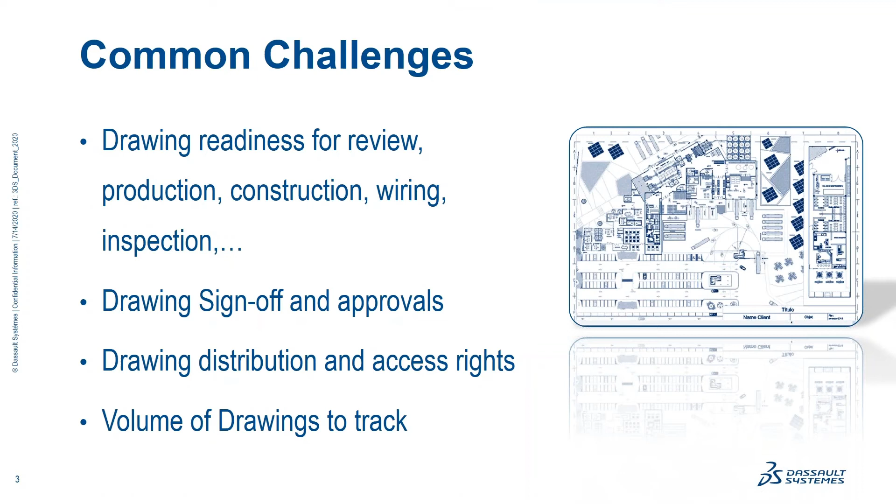With that come processes centered around sign-off and approvals, as well as the distribution of drawings and associated access rights. What we've learned over the years, being at the forefront of design tools and applications here at SolidWorks and Dassault Systèmes, is that the volume of drawings to track is, for most of our customers, pretty sizable. That's a problem we are attempting to solve.

We are bringing together people across an organization, data, and design ideas. Our 3DEXPERIENCE platform, a cloud solution, is uniquely positioned and purpose-built to make that happen, to bring together unstructured collaboration as well as structured collaboration methodologies, where many people in an organization can share information seamlessly through technologies such as cloud file sharing, similar to what you might use today, but also combining that with the ability to dashboard information and leverage communications through communities. That's all unstructured, and we have some solutions to address the challenges that might come with that.

But with drawings, as it relates to sign-off and approvals, there's also a very structured element to it. Here we'll show you some capabilities around lifecycle management of DWG design files, task management, all the way to project plans, and show you how you can leverage these two technologies, DraftSight and the 3DEXPERIENCE platform, to bring these two domains of data management and design in drawings nicely together.

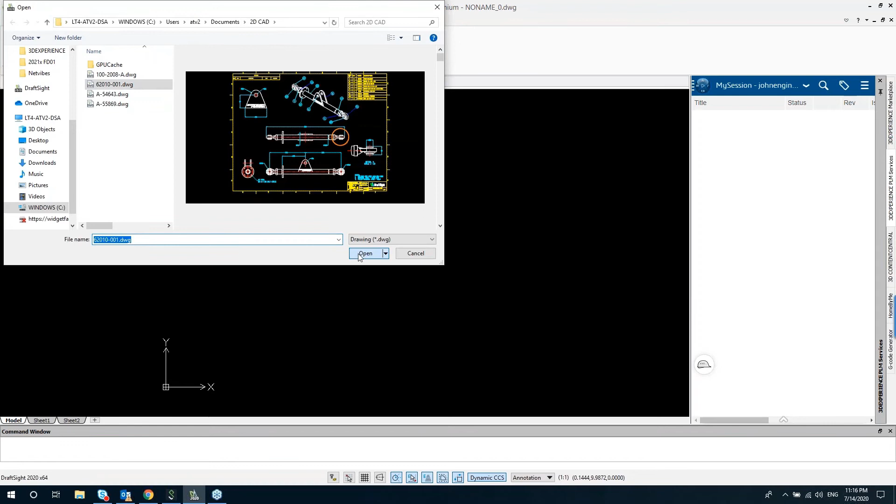Loaded beautifully in DraftSight. Now let's take a look at the 3DEXPERIENCE task pane on the right side of the screen. I'm going to expand it so it's a little easier to see. As soon as we open a drawing in DraftSight, the platform recognizes that we're working on a particular DWG drawing.

A few things to point out: we can see the title of the drawing, its current status, and in this case it is currently not synced and not stored on the 3DEXPERIENCE platform. We can also see which revision we're working on and whether this is the latest version available on the cloud.

To get started, I'd like to show you the various options available when managing a drawing on the platform. If you have a drawing saved, you can open it directly from the platform into DraftSight. We can save it, which we'll do in a moment. We can also reserve it to make sure no one else is working on the same drawing, and unreserve it once we finish making changes.

We can make sure we're working on the latest copy by reloading it from the server, and also replace it with a different revision if needed. We can control the maturity of a drawing and create a new revision directly through the DraftSight interface. So first, let's save the drawing so it's available on the platform.

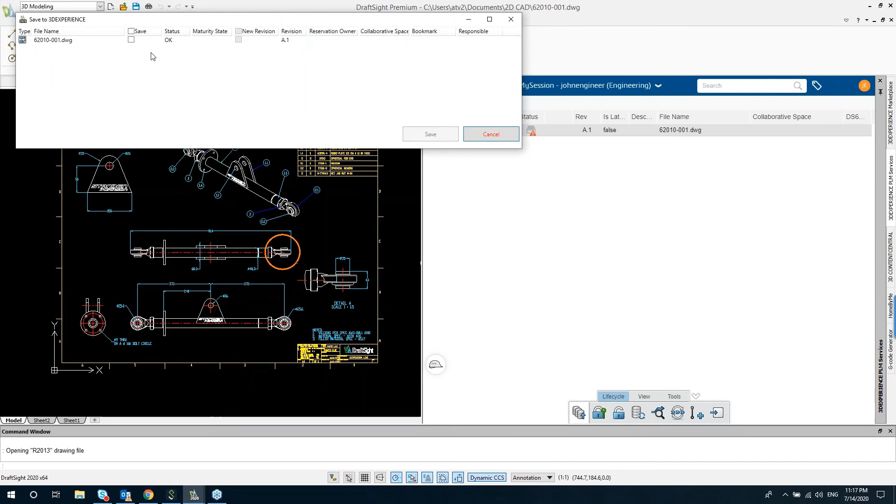We can verify that the status of the drawing is okay. We're saving revision A1. We'll check and click Save. The drawing is automatically saved and uploaded to the platform, available to all other users. We can see the status has updated automatically, and the drawing is currently not reserved, so it's available for anyone else on the engineering team to open in DraftSight and work on.

Now I'd like to review what maturity state this drawing is in. By right-clicking and going to maturity, we can see what state the drawing is in. This is the workflow available by default, but it can be customized to suit your needs. Currently the drawing is in work. We can freeze it, or release it if we've finished making changes.

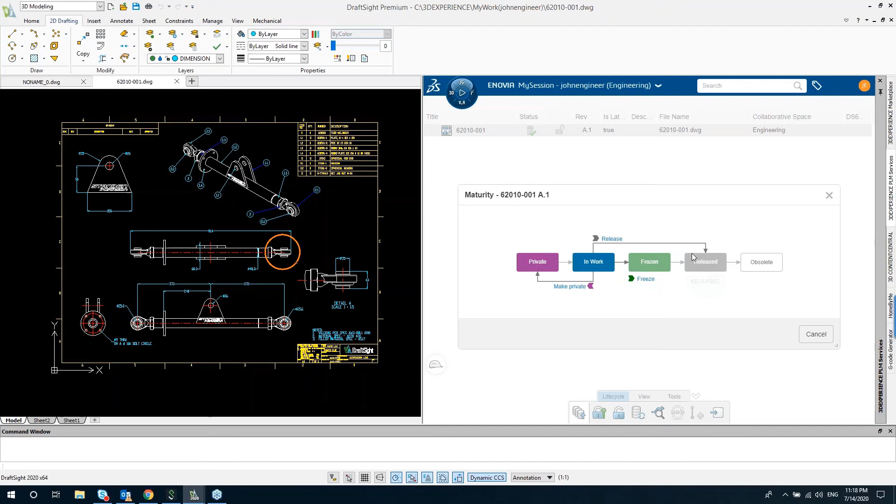So let's release it. By simply clicking, the drawing is automatically released. We'll get a notification that the maturity of this drawing has been updated, and this is the latest version being saved to the 3DEXPERIENCE platform.

Now, what happens if we make a change to a released drawing? I'll go into DraftSight and change one of the colors for the layers. We'll choose the dimensions - currently they're cyan - and change them to green.

I'll save this locally. As soon as we've changed the drawing and saved it locally, you'll notice the status has changed, because now we are not working on the latest version of the drawing that has been saved to the 3DEXPERIENCE platform. So we'd like to save our new version, the one with green dimensions, to the platform.

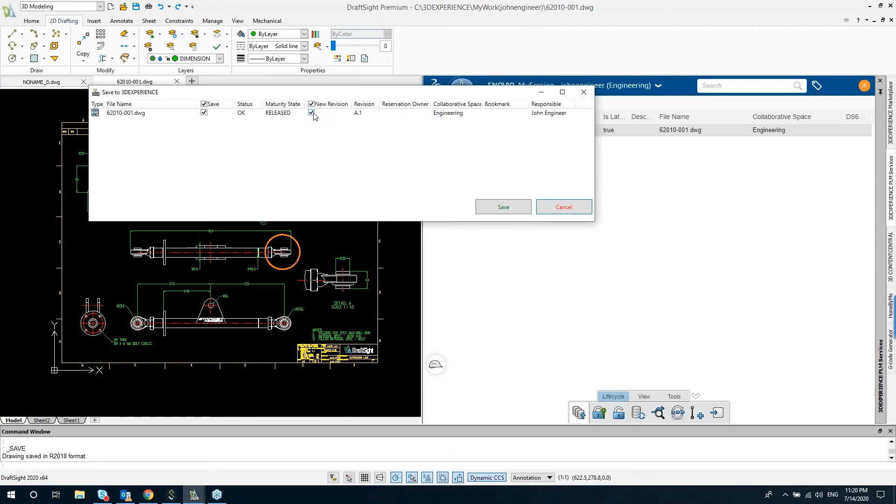Now, one thing to note - I already released the A1 revision. It was not in an in-work state, so I can't overwrite it, but I'm able to automatically create a new revision so everyone else can see that I've made a change without affecting the released version. By selecting new revision, I'm able to save and synchronize this to the platform.

It's automatically updated, and the status is green. We'll notice that a new revision is automatically created for us, in this case B1, and the drawing is available to the team.

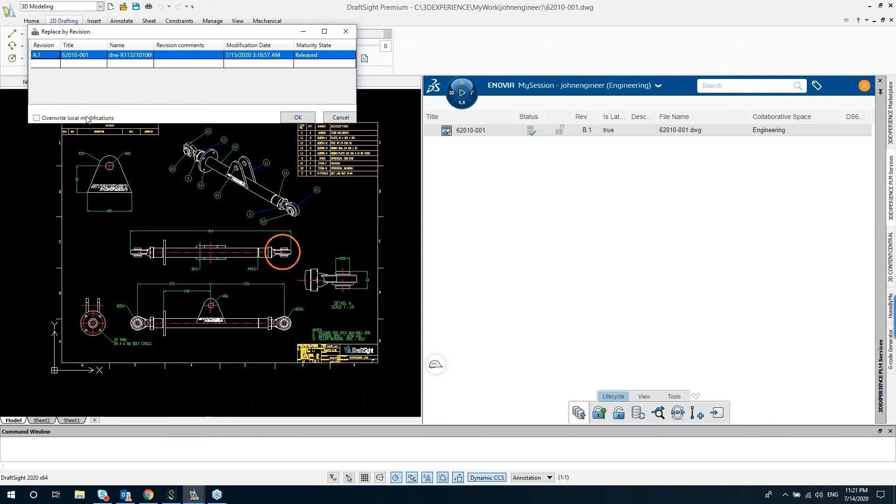If we ever want to revert and go back to A1, the first revision that was available, simply right-click and use the Replace by Revision option. We're able to see what revisions are available. Let's select A1 - we'll overwrite any of the changes I've made and come back to our original drawing.

This is a simple example of how we can manage drawings directly from DraftSight and from our desktop into the cloud, so they're available to everyone. We can create new revisions automatically and not waste time emailing or chasing down the latest versions of any drawing. But we can go a step beyond that.

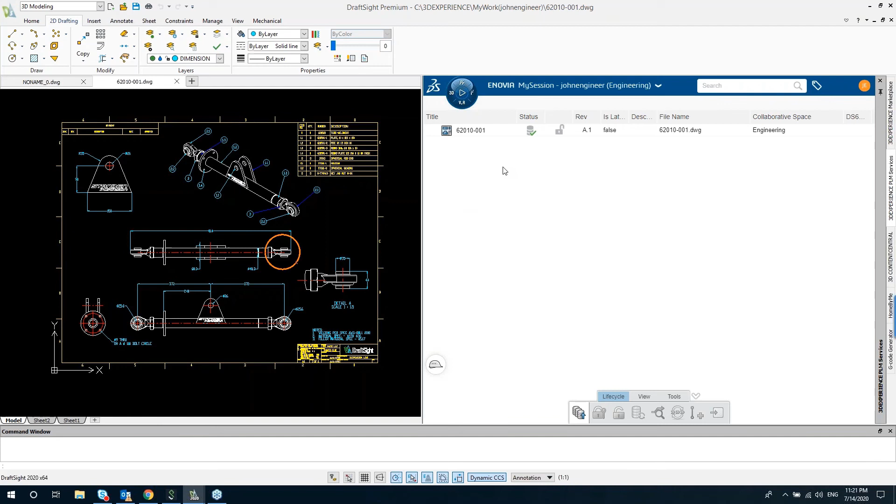We can collaborate and manage and assign tasks. There are additional apps and roles available on the platform, and I'll take a quick look into the Collaborative Tasks app, which allows a manager to assign a task to his team, attach any deliverables, and work directly through DraftSight.

So I've been assigned a task of finishing a drawing. Currently it is in a to-do state, and I can also see there's an attachment for this task. I'd like to start working on it, so first I'll move this task into the in-work state.

I'll open the task. The requirement is to change the dimensions to red. It's currently in work, and I can see which drawing I'm supposed to work on. So let's open that drawing directly inside of DraftSight.

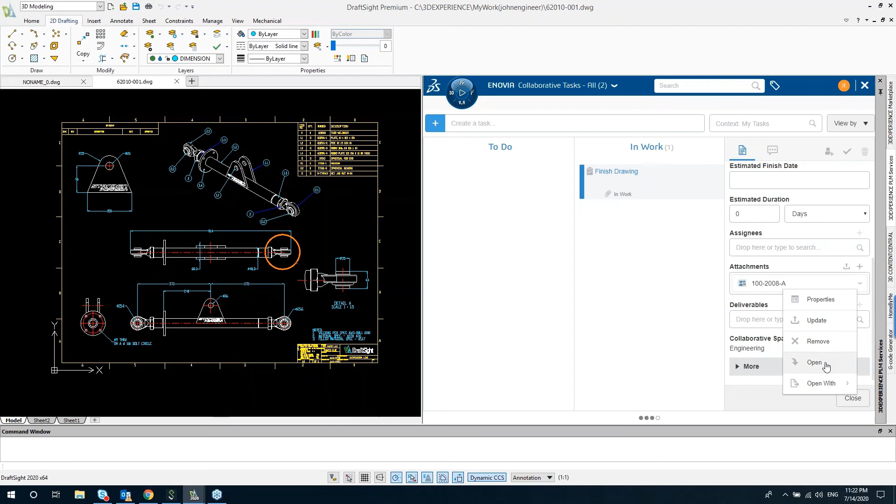As soon as I click open, it's going to get the drawing from the 3DEXPERIENCE platform and open it directly inside of DraftSight. I'll go back to my session to make sure that I'm working on the correct revision.

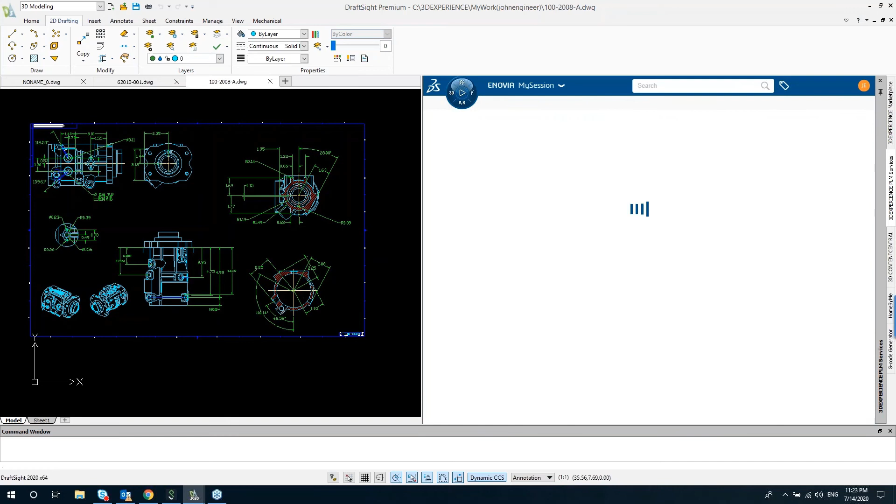Make sure it's saved locally as well. We can see that because I've made a change, the drawing has not been synced to the platform. I'd like to reserve it to make sure I'm the only one who has access to it at this time. You'll notice that as soon as a drawing is reserved, you get this little green key icon to show that you're the only one who can access and work on the drawing at a given time.

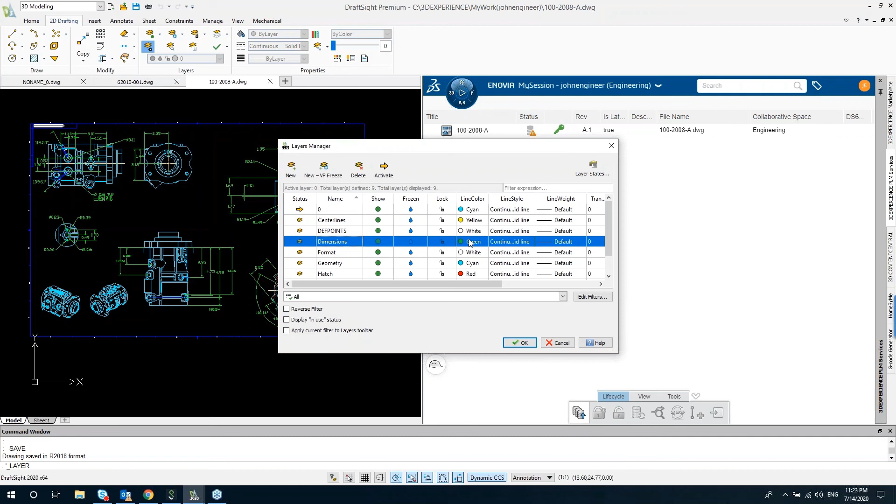Now we'll make a change, so we'll make the dimensions green as requested, red as requested. We'll save it here, and then make sure the latest version is updated to the platform. Now the drawing is in a work state. It hasn't been released, so we can override what's been stored in the cloud and click Save.

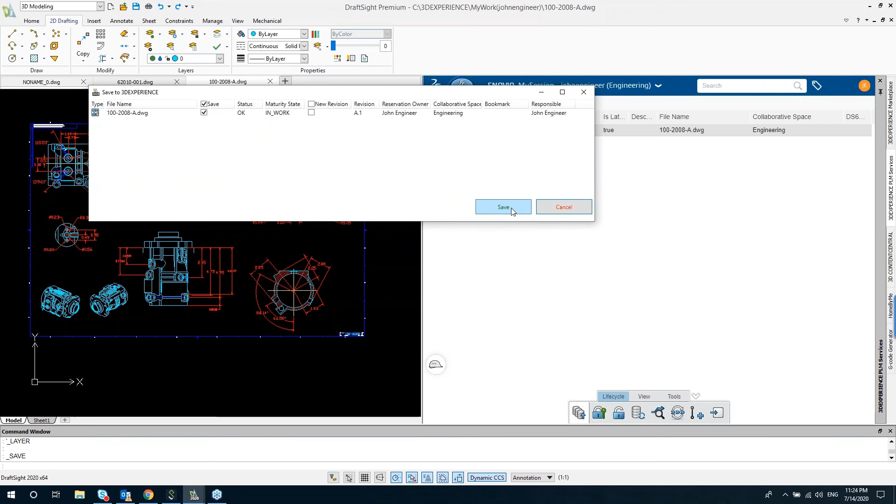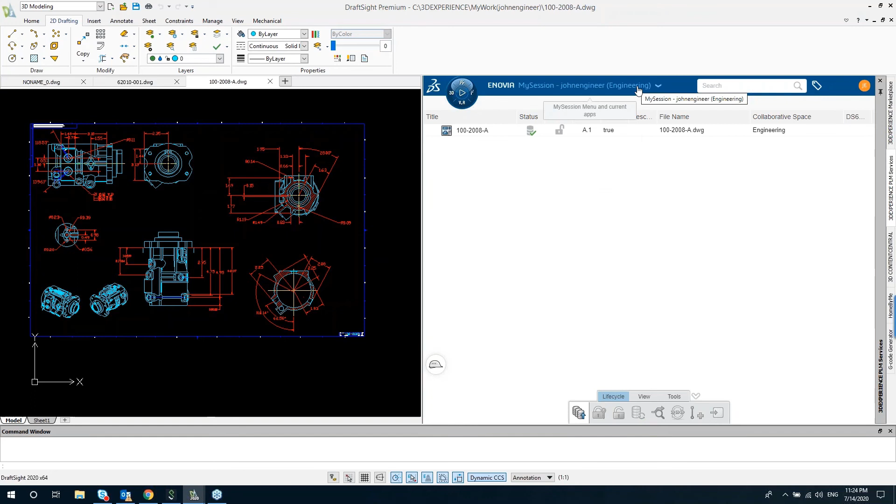The drawing has been updated, and we'll also unreserve it so that everyone else on the team can review it and make any additional changes if they've been assigned that task. The drawing has been unreserved. We're working with the latest version, so our job is complete. We'll go back to the Collaborative Tasks app and mark this task as complete.

So we just looked at a way of leveraging the 3DEXPERIENCE platform beyond just managing a drawing. We can also assign tasks, add attachments to them for other engineers to complete, make adjustments, assign deliverables, upload the latest versions, and complete our workflow.

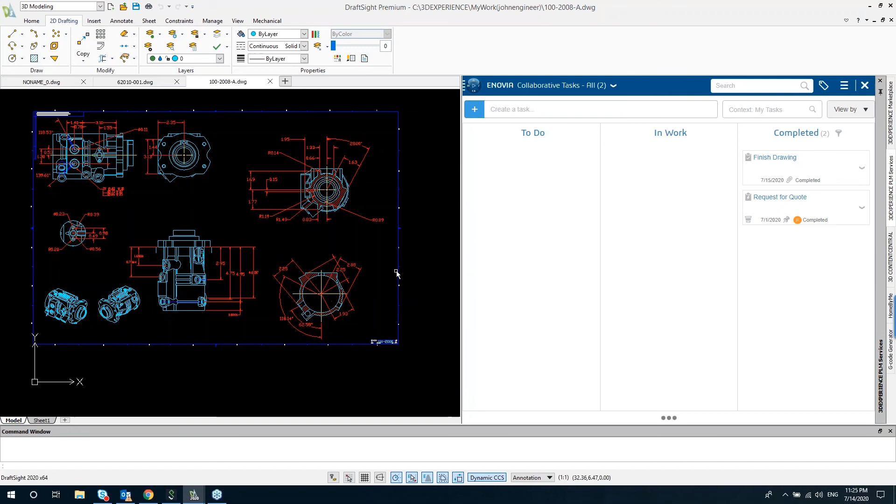So let's actually take a look at the 3DEXPERIENCE platform. I'll jump over into my browser, into Google Chrome, and I'm able to access the same functionality that's available in the task pane inside of DraftSight. I can see the drawings, track the life cycle, and also see my tasks in one single view. First, I'd like to review the drawing that I was just working on a minute ago, and I'd like to see what state it's in.

By dragging it into the Collaborative Lifecycle app, I can see that this was revision A1. It was modified about a minute ago by us when we updated and saved it to the platform. Now we'd like to release the drawing. It's automatically been updated. If it ever becomes obsolete, we can make additional changes and send it back to the in-work state.

And this is just working with drawings. We can also create revisions directly on the fly inside of our browser, inside of the platform, and we can go a step beyond that. So let's take a look at some of the other applications that are available on the platform that help us get our job done. Let's jump over into the Project Management tab.

We can create projects to track our tasks so that we're working in a much more organized way and in a workflow that's suitable for our team. And this is not limited to just engineering. We can have projects for the finance department, for sales, for product management, for any group, team, or department in an organization. But we'll stick to engineering for now.

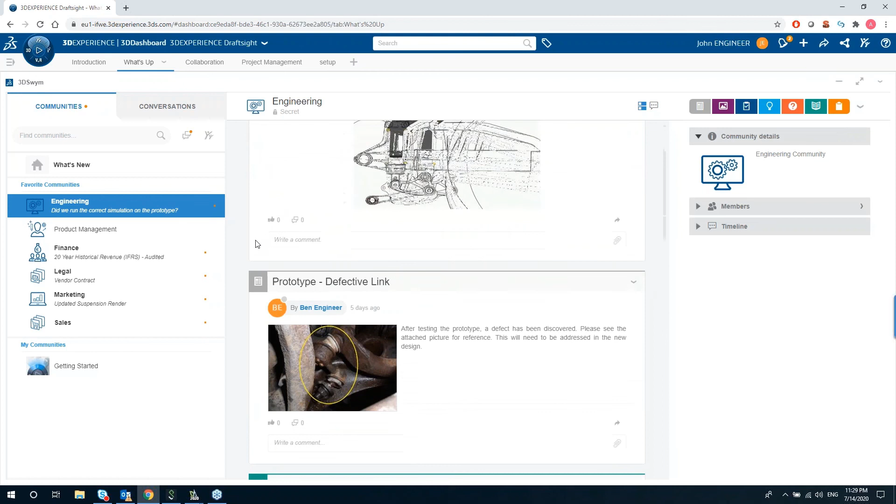For example, we can jump into our wiki and look at some of the design standards that we're leveraging or any quality standards for the projects that we're working on. We can additionally share images, for example from Ben, there was a defective suspension link shared from a customer. We can share simulation results, and we can also upload CAD data directly into a community.

And again, this is not limited for just engineering. Product management can leverage communities to share framework and to share best practices in their methodology for tracking projects and products. Finance can share financial results in one single view. Marketing can receive product renders from engineering. And sales can track market reports and market insights, leveraging some of the additional roles on the platform.

So all of these different departments are working in one single environment, collaborating, whether it's engineering and DraftSight or product management working in 3DSwym communities and the project planning app, or finance and sales just using 3DSwym to share content and give visibility to the right key stakeholders. So that's a very brief overview of the 3DEXPERIENCE platform and how it works together with DraftSight. And with that, Andreas, I'll turn it back over to you.

Thank you, Alex. This was a fantastic demonstration. I never get tired of seeing it in action like this. Can you guys see my screen okay? Yes, we can. Yep. Okay, fantastic.

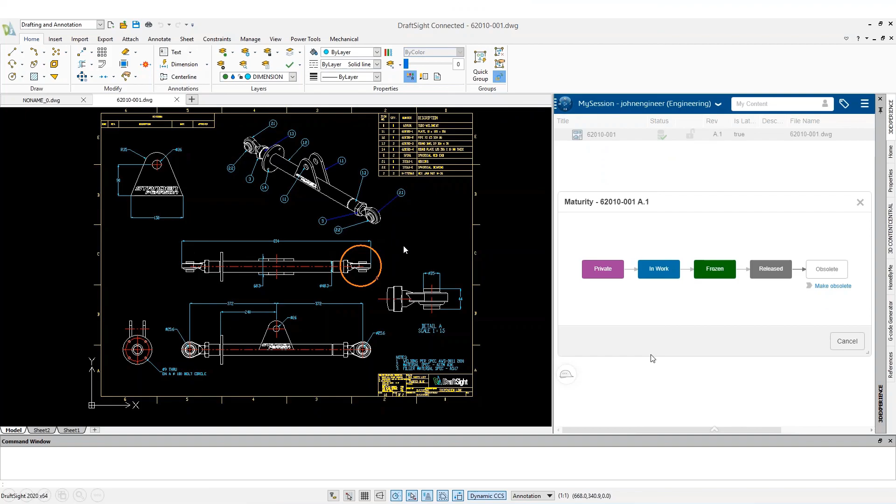So just to recap, DraftSight integrated with the 3DEXPERIENCE platform, enabling solutions around common challenges: drawing sign-off, approvals, visualization in terms of drawing readiness, distribution, access rights, and it is not limited in any way, shape, or form in terms of the volume of drawings that your organizations may have.

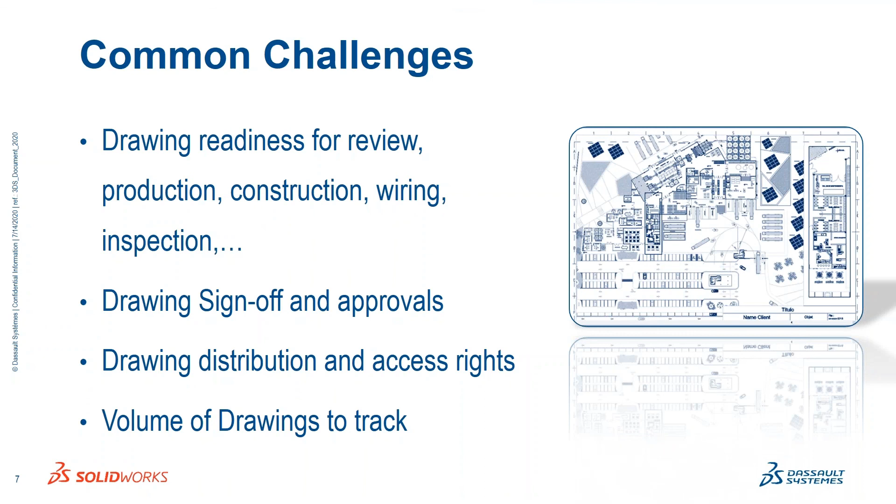DraftSight is a professional-grade 2D, 3D CAD solution. With it, you can create, edit, and view or mark up any kind of DWG design file, and you can move effortlessly back and forth between 2D and 3D. And it's part of the SolidWorks Dassault Systèmes portfolio, backed by a very large R&D organization.

With the integration with the 3DEXPERIENCE platform, we're now bringing to you drawing data management. We're helping our clients to make sure that mission-critical drawings and documents are never lost. They're stored in the cloud on the Dassault Systèmes 3DEXPERIENCE platform. With it, we're able to reduce errors by providing team members with access to this intellectual property that is such a vital part of your overall operations.

And we're also making sure that you're always working on the most current drawing and its revision, all coming from a single source of truth that is accessible to everybody within the organization.

We've coupled it with project management. Project management being a vital part of the overall process that many of our clients execute, where drawings are part of deliverables, they're part of milestones, and executing on these plans rapidly and effortlessly in a team environment is critical for many companies today, breaking down the information barriers and silos that still exist today.

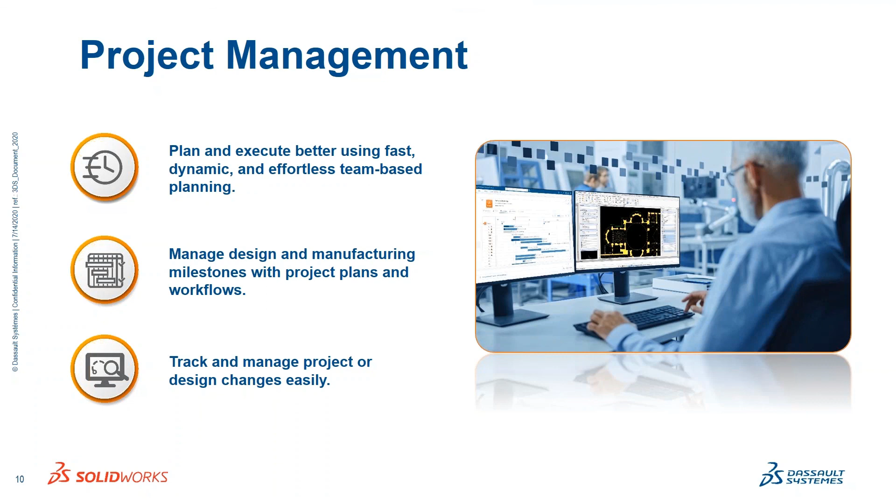Managing design and manufacturing is becoming a very effortless task, and the ability for your management teams and all stakeholders to track the status of projects is now at your fingertips. And the 3DEXPERIENCE platform is the enabler for all of that. It allows for seamless access to documents, to drawings, to models, to tasks.

We showed you only a very small segment of what the 3DEXPERIENCE platform can cover, centering around drawings. There's much more that it can enable in the context of processes and workflows as it comes to product development, marketing, and sales. It connects all the stakeholders and helps for a faster transition in and out of manufacturing, helping to overall improve your organizational productivity, as well as streamline innovation in real time with collaboration technology that we gave you a quick little glimpse today.